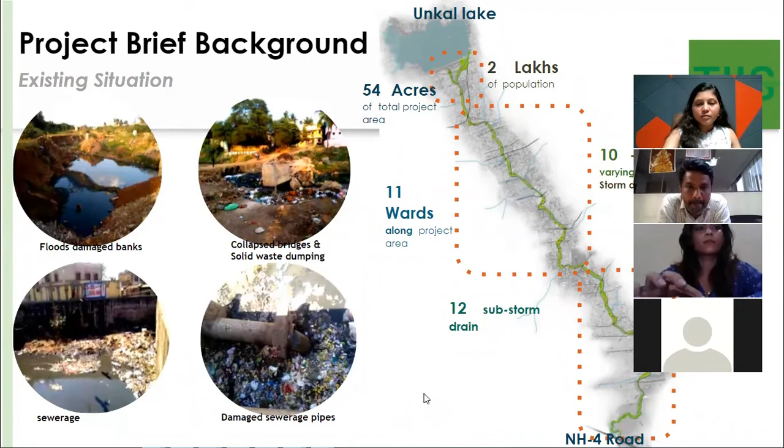The vision of this project is to construct an NMT corridor, that is a non-motorized transport system, across this Nala. Once we develop this as an NMT corridor, a lot of activity will take place. For example, we will be creating green space, putting open gyms, amphitheaters, and rain shelters, and also developing some bridges. Once this becomes an NMT corridor, it will improve the living conditions of people residing beside the Nala, and also boost the economy of Hubli.

As I explained initially, the goal of this project is the development of the entire Nala. We are providing Gabion walls and retaining walls wherever necessary, and these walls will act as sewer passage channels. Presently there is no proper channel in the Nala, so once this entire stretch is developed, it will become one of the beautiful places in Hubli.

We got it as a green mobility corridor, so there will be a lot of landscape development taking place. It will also connect crisscross roads, as I explained initially. As you can see in the drawing, the Nala crisscrosses the center of the city, connecting both the left side and the right side.

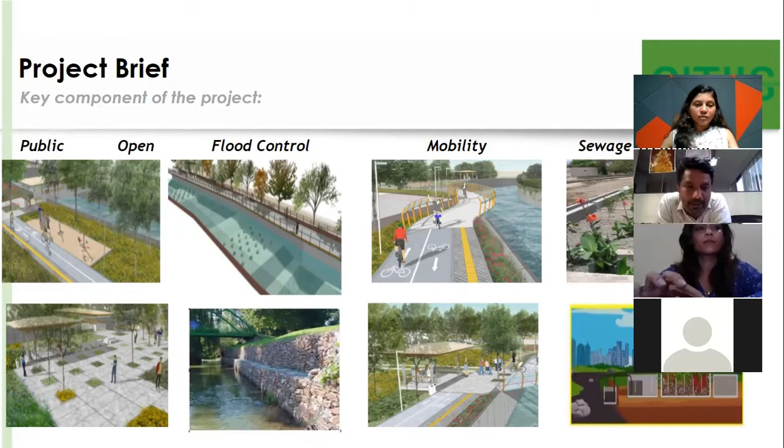As I explained earlier, we have taken a lot of measures in the design, for example flood control measures. We have kept a team for this mobility corridor, considering all aspects of design as well as open space, and we considered all our elected representatives and stakeholders' thoughts about this project.

The need of the project is that presently there is inaccessible public space, environmental degradation, and the water flowing in the Nala is fully polluted. For example, there are no sewer treatment plants presently in the Nala, so we are putting sewer plants wherever necessary, and after treating, that water will be let into the Nala. It will act as clean water, so there will not be any harm to the people residing there.

Presently there is a fully dilapidated condition, not easily livable. So we are developing it, and due to the lack of infrastructure facilities, we are providing it as a mobility corridor. A cycle track will come, and we'll also provide Gabion walls and retaining walls so there will be a proper channel. Landscape will also be developed in this part of the project.

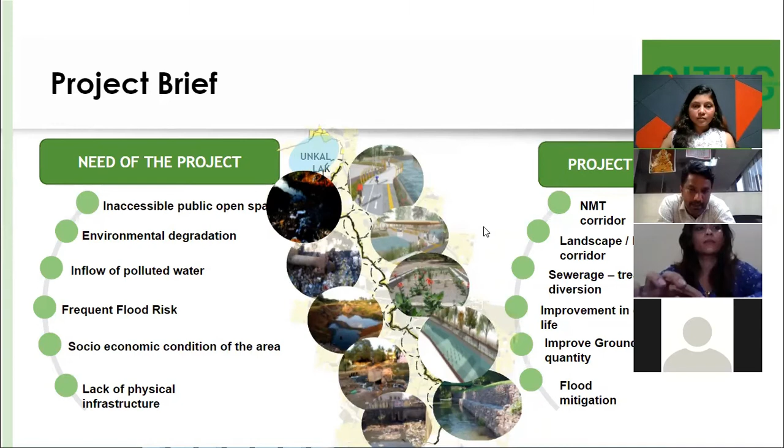The main objective is the NMT corridor and beautification of the Nala, a proper drainage channel, and potential areas for the ecosystem to give proper justification, creating a decentralized system of stormwater. Presently there is no stormwater facility across this Nala. Once this problem is addressed, there will not be any flooding issues across the Nala, so that part we are taking care of in this project.

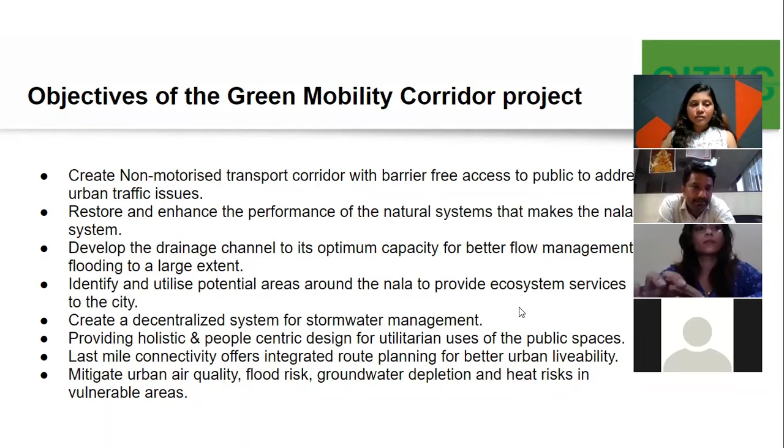After development, the project components include a bicycle and walking track, a children's play area, a public amenity center, landscape development, and an open gym. We are also providing around 6 to 8 public bicycle stations so that one person can take a bicycle from one place and drop it at another, and we are constructing foot-over bridges as part of this project.

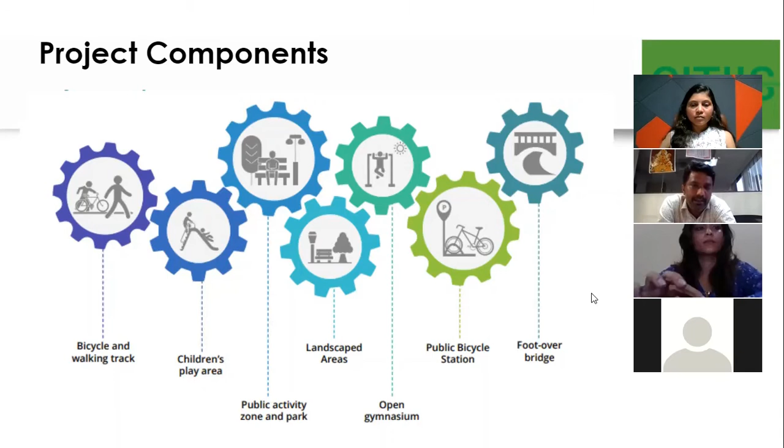This is the brief of this project, as I explained earlier, and these are the components from the previous slide.

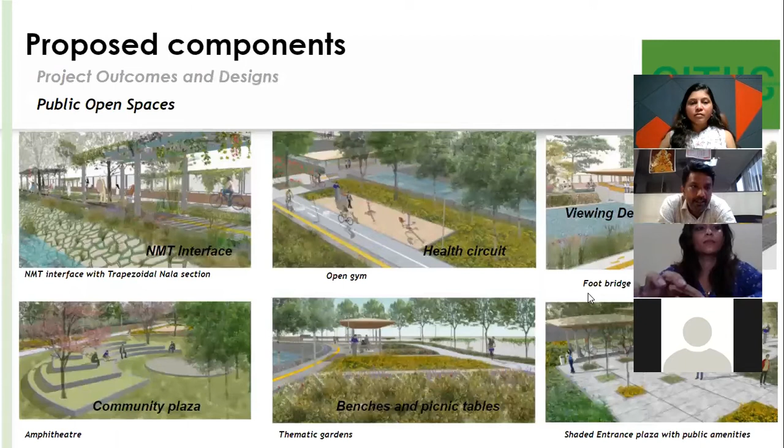These are the project components: 24 rain shelters will be there, 6 public bicycle sharing stations, and 4 integrated amenity centers. These contain an outdoor gym, children's play area, amphitheater, and yoga space. All the amenity centers are being developed in this project area.

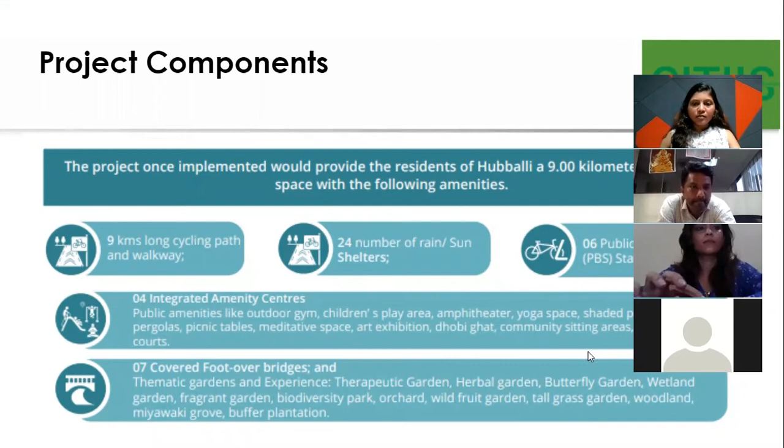Once this project is done, as I said earlier, the quality of living will increase, standards will improve, and the economy will also boost. There will be a safe and easy environment for the public, so there will be safety for everyone.

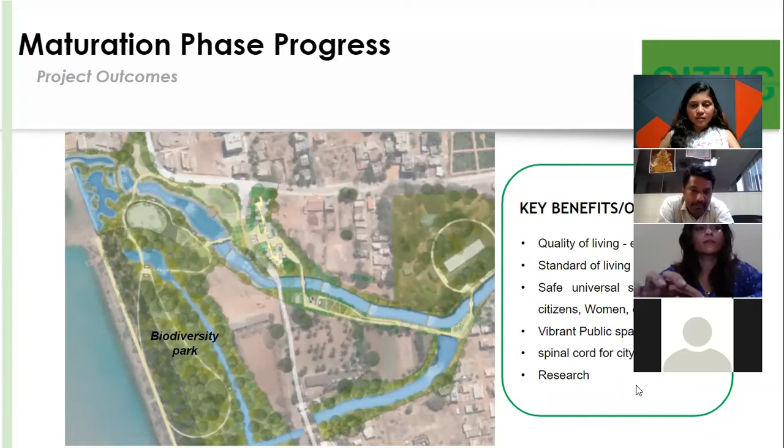The participatory approach is one of the good concepts in our CITIIS program, where we address all concerned authorities' problems. We are taking input from all stakeholders, those residing near the Nalas, SHGs, citizens, and elected representatives like local bodies and government bodies. Based on that, we are designing the DPR, so it is not designed by only some people. We are addressing all issues from sewerage to the NMT corridor, covering all the problems presently in the Nala.

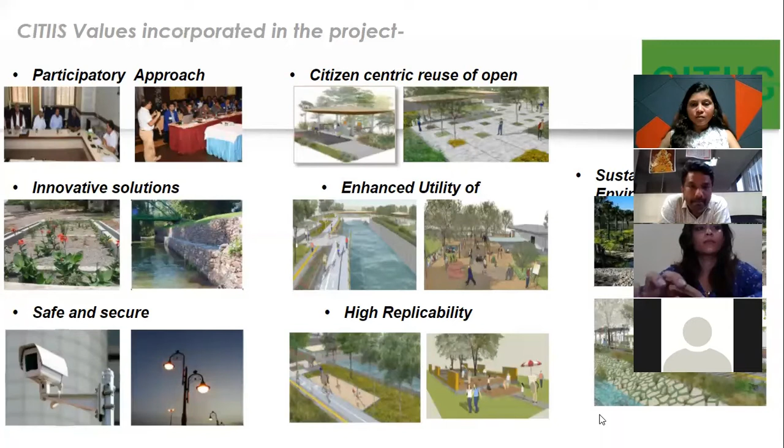And regarding this competition, Vidya ma'am will explain. Yeah, can you hear me? Yes, yes. Thank you, Basavaraj, for that introduction to the project.

I'd like to talk about the competition itself. The webinar today is focused on the competition that we've launched. When Basavaraj spoke, he mentioned that the participatory planning aspect is a very important part of the CITIIS project. It is one of the core values, apart from the other values of innovation, integration, and sustainability. Given that this is the context, and last year with the pandemic, we found it very difficult to conduct all the various activities that we had planned for engagement with the general public.

As a way to compensate for that, we're trying to figure out what else we can do to have the citizens of Hubli participate more actively in our project. We came up with this idea to have an open ideas competition to design an iconic urban gateway for this project.

So we've heard about the core aspects of the Green Mobility Corridor project, why it was conceptualized, what it can do, what are all the benefits, and what are all the components that it will have. Apart from that, we thought that it would be nice to have an iconic urban gateway, like an entry point. This is a beautiful infrastructure that is going to be built across the entire city, starting from Unkal Lake all the way to Gabbur, covering the entire length of the city from north to south.

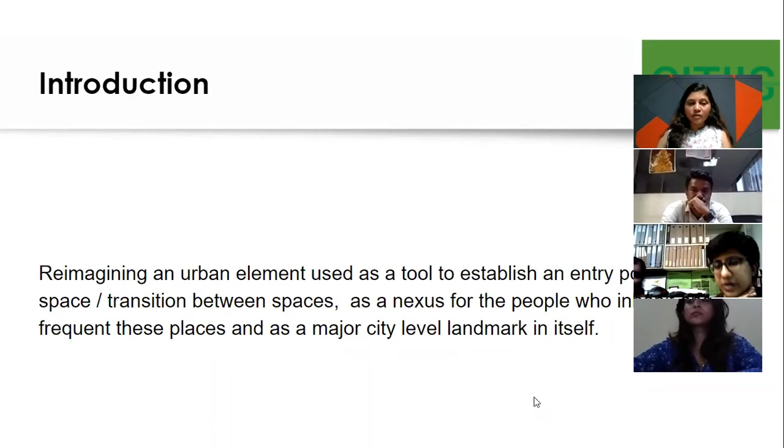So, what is a gateway? As we were thinking about it, we wanted to put down these points here so that it gets people thinking about it as you're letting the ideas flow. Very simply, it's an entrance, it's a gathering place, and a gateway can frame a vision, like it can frame the entire project itself. It can become a transition between different spaces. It can be very distinct, but also reflect the local identity.

It can create an element of suspense for the space within the Nala that people can look forward to by the design of the gateway itself. It can also create legibility, and this is when we say legibility, not just for the surrounding, but also for the city itself. So many things a gateway can do depending on how it is designed.

So keeping all of this in mind, the challenge that we've come up with for all of you people who are participating, is that we would like the place between the Gokul Road Bridge and Bridge number 9 - the High Court Bridge - this is the crossing point in front of the High Court and the Gokul Road crossing point. This is the chosen project site area.

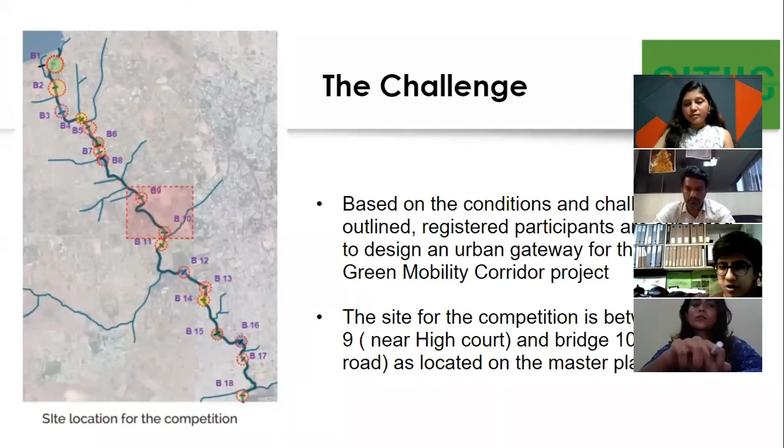So this is the sort of extended project site and the context that we're setting for this challenge.

So what you have to do as participants for this competition is to identify an exact location for the element, and of course all of this could depend on the kind of element that you are designing as well. The element itself should impart a very strong sense of legibility with a local identity.

We are looking for sustainable and innovative design solutions, and how you want to reflect that in the design will be evaluated as well. Mainly, we want to integrate with the project principles and the site context. The reason why Basavaraj gave us an introduction to the project is so you are aware of what the whole project is about, how it came to be, what this project will be doing for the city, and how you are going to situate your project within this context. That is very important, and that's one of the things we'll definitely be looking for in all the entries we receive.

As far as regulations go, we would like that the height of the proposed gateway does not exceed 10 meters. So you can work with that as well.

There are certain eligibility requirements for the competition. Because of the very reason why we've introduced this, we would like it to come from the residents of Hubli, people who will be using this infrastructure once it is built. So we're looking for teams with a maximum of 3 members, and at least one person on the team must fulfill one of the following criteria: either a local resident for the last 5 years, someone who attained a professional degree from an educational institute in Hubli, a practicing professional living in the city for at least 2 years, or a student currently pursuing a degree in a college in the city. These are the main eligibility requirements, listed in our competition brief as well.

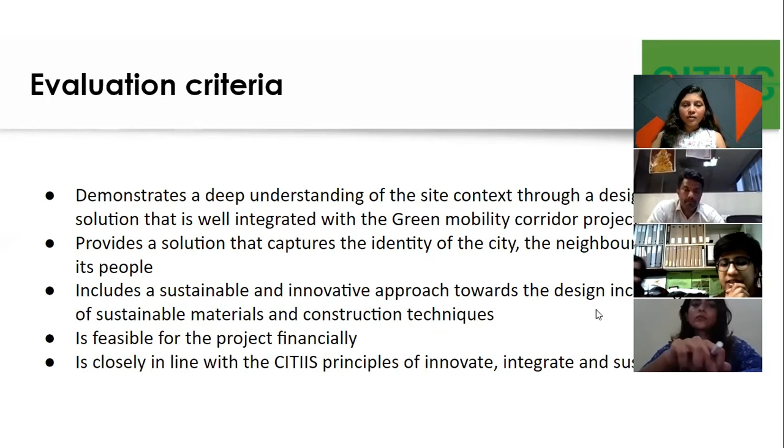And of course, it's important that the project be financially feasible as well. We can't have a gateway element that costs as much as the entire project. There is a budget, for the entire corridor, and that amount was also mentioned. So in that sense, the design needs to be financially viable as well.